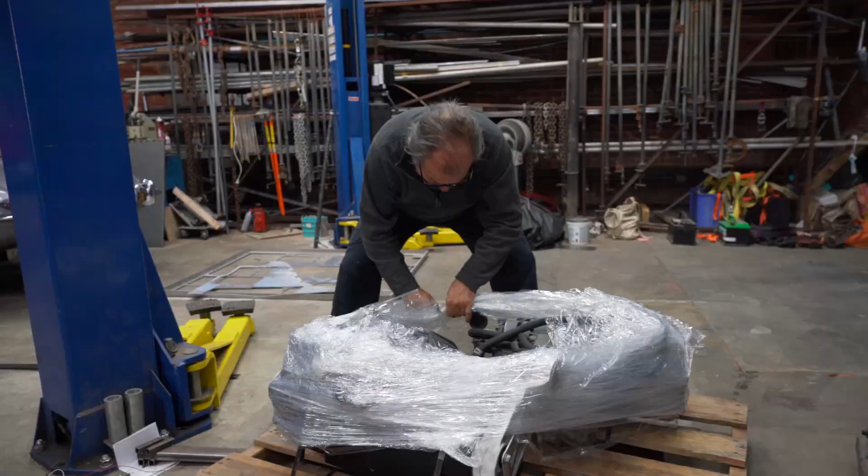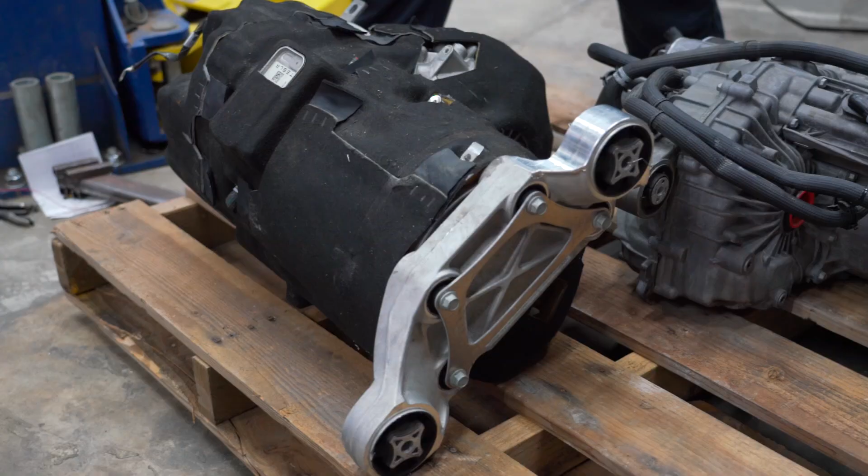Got a delivery today, got a couple of motors. This is a front drive from a Model S, which I'm going to be putting into the rear of the green Samba. And then this one is for another project, which I'll explain later. But at least now I've got this so I can model it and I can get it put into the bus. Also, I can show you how I've redesigned the mounts because I'm actually going to take this thing.

It normally just tips up at a 45 when it's in the Model S. I'm going to bring it all the way up to 90 so I can push it way into the front of the bus. It'll take less room, but I do need to adjust the mounts for doing that so that all the torque is in the right place. So I'm going to show you how I'm mounting this.

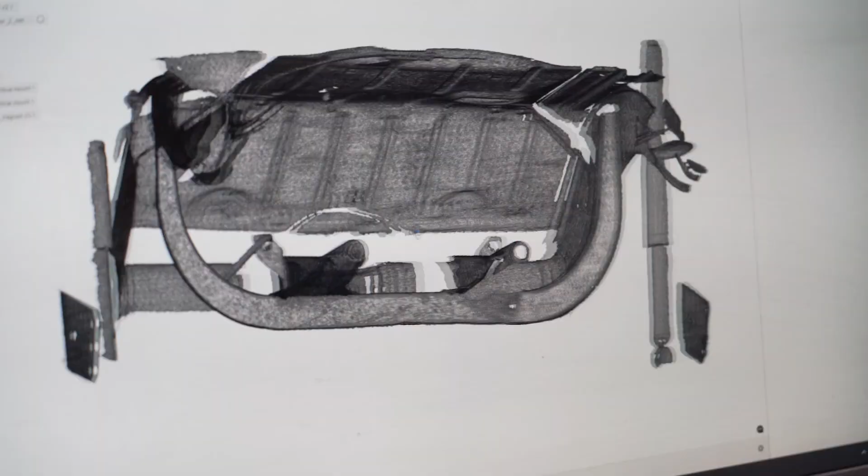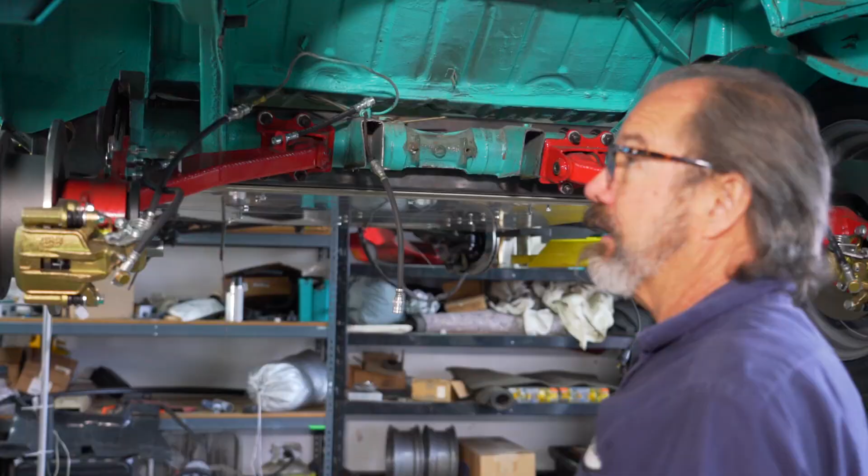So here's the front drive motor from a Model S. So what I did is a rough scan of the engine compartment in the bus, and that's what this is. It doesn't have to be super clean, it just needs to be to scale because I'm taking a bunch out. So here's the drive unit now, but by moving it up to vertical, I get a lot more space to use inside the car. The motor's gonna sit here, we'll have our axles here, and this area will turn into a nice little trunk space.

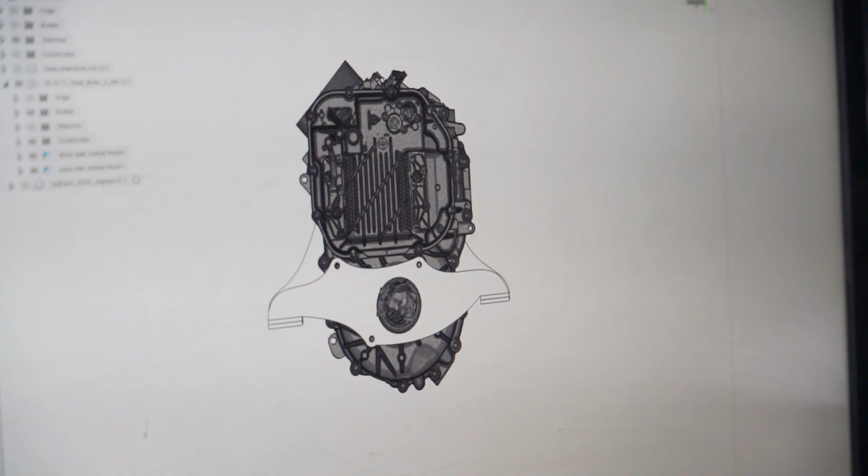But what I had to do was to change the engine mounts. So now that I've flipped the motor up, I need to come up with a different bracket. So I made this new bracket sit here, and that way when the rubber mounts are here, it's gonna react against that shaft. And here's the other side, it's the same thing. This bracket, which used to sit at that angle, now is here and is about this axle. So the same thing, that reaction will be around the axle and not causing the whole thing to wag.

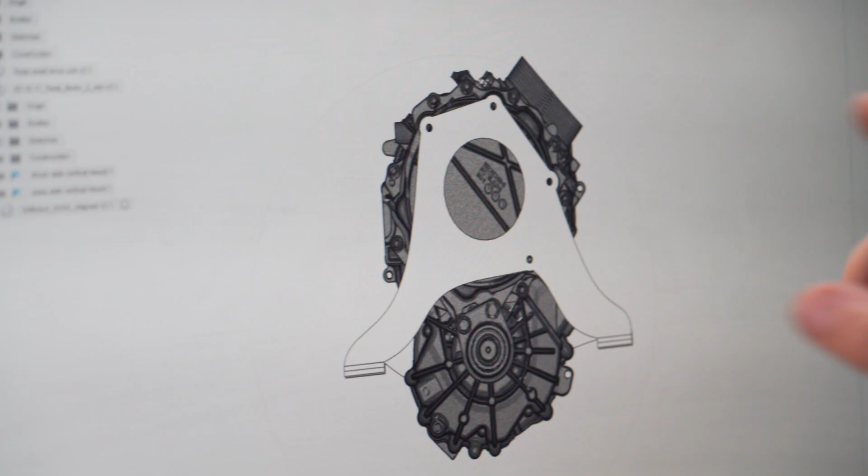So the way I like to attack things is with proper engineering. Because I'm really about the details, I wanna make sure that this thing is reacting against this shaft and not anything else. So this white part is the bracket that I'm gonna make over on the plasma cutting machine. So I'll be making these two brackets out of 1/4" steel. And I prefer not to weld. I prefer to bend whenever possible. It's best to, whenever possible, do the bend. It's also quicker and you end up with a better, stronger result.

It looks like it's gonna fit great. It's gonna be a great little install and easy, which is what I like. So that's where we stand now on the Samba. We'll be doing another episode where it goes in, so stay tuned for that.